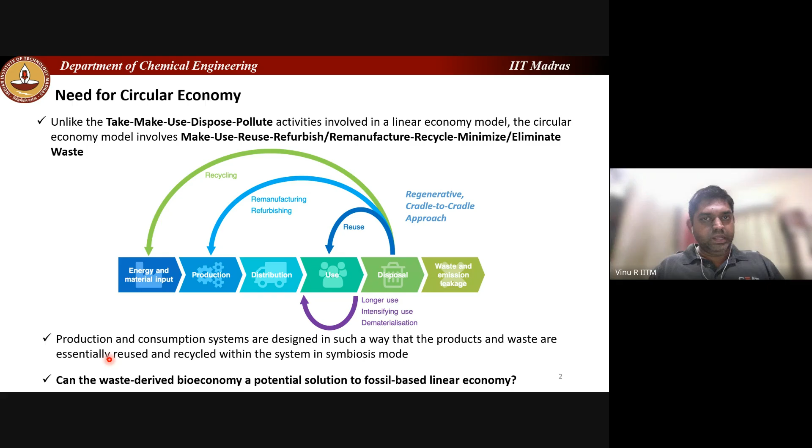Ultimately, the question is: can the waste-derived bioeconomy or circular economy be a potential solution to the fossil-based linear economy? This is still unanswered. There are a lot of challenges, which we will see.

What is a sustainable economy? If you think about it, take the example of the net zero pathway or net zero goals that different countries have agreed to, like the Paris Treaty. What it basically says is we try to make sure the global average temperature rise is kept within 1.5 degrees by bringing in a lot of strategic interventions.

But there are also reports that say this has already crossed 2 degrees. There are various reports that say that. So typically, a sustainable economy has to be viewed as one thing: it has to be bio-based, it has to be low carbon, and it has to be circular. I see sustainable economy as an intersection of bioeconomy, low carbon economy, and circular economy.

That means we try to replace a lot of fossil fuel derived materials with bio-derived materials. We try to achieve low carbon intensity emissions in the various processes we deploy, and we also make sure the materials go through a circular pathway, thereby enhancing the lifetime of these materials in our life cycle.

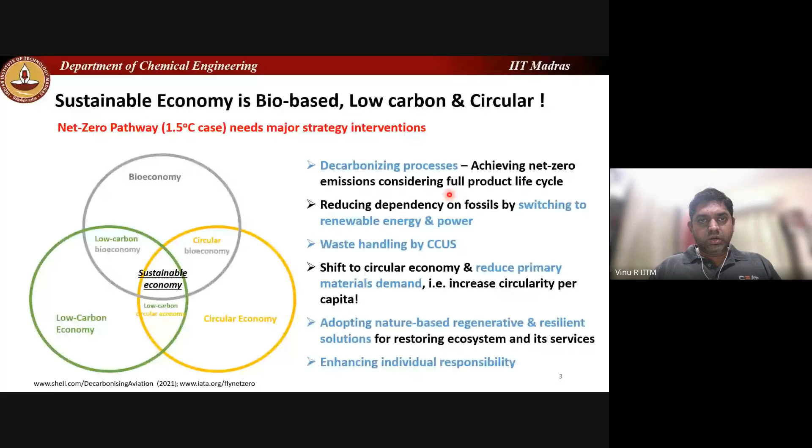So how do we achieve decarbonization? You might wonder why I'm talking about decarbonization here - it's about circular economy, but I feel circular economy is very much linked to energy, and waste and energy cannot be, or should not be, delinked from each other. We need to look at waste and energy as a single entity, or interrelated entities.

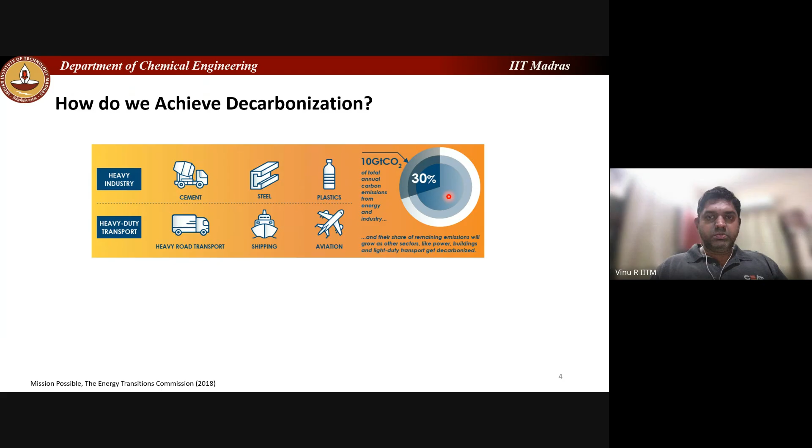If you look at the major industries emitting CO2 into the environment, it's basically the heavy industries: cement, steel, and plastics - that is, refineries. In terms of heavy duty transport, it's predominantly trucks, that is road transport, due to diesel use, shipping, marine fuels, and aviation fuels. All these put together contribute to about 30% of annual carbon emissions.

If I take the example of the aviation industry, it is leading to a lot of CO2 emissions, and today there is a lot of talk about sustainable aviation fuel, or SAF, that many countries are marching towards. There are even targets set that by 2030 there will be a certain number of billion liters, or a certain percentage of SAF, incorporated into aviation fuels.

If you look at the SAF requirement to achieve net zero by 2050 - 2050 is an ambitious target - you see that the amount of sustainable aviation fuel that must be produced is actually exponentially increasing.

Today we are actually very low in terms of SAF production, but if we have to achieve net zero, we have to really go up to 450 billion liters of SAF all over the world. That's a huge target. This is typically the impact of the emission from conventional fuels, and this is a compensation that we need to achieve decarbonization.

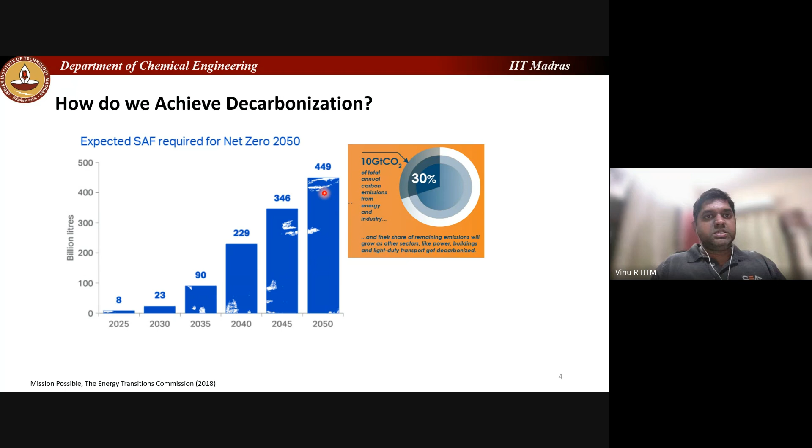So there are various roadmaps to decarbonization. The first thing is always reducing demand for carbon intensive products and services. That means we need circular economy in heavy industry. Thereby we can really make sure we are able to reduce the carbon emissions by 40% in it.

Similarly, if we are able to have efficient logistics, we can still reduce our carbon intensity by 20%. Improving energy efficiency is quite common to a lot of different process industries, where energy consumption has to be monitored in different processes, and we need to make sure the energy efficiency of the process is improved.

Ultimately, we need to move toward renewable power that is very much accessible due to solar and wind. There is a possibility that massive electrification can be done, and that can lead to substantial CO2 reductions, with electricity coming mainly from renewables.

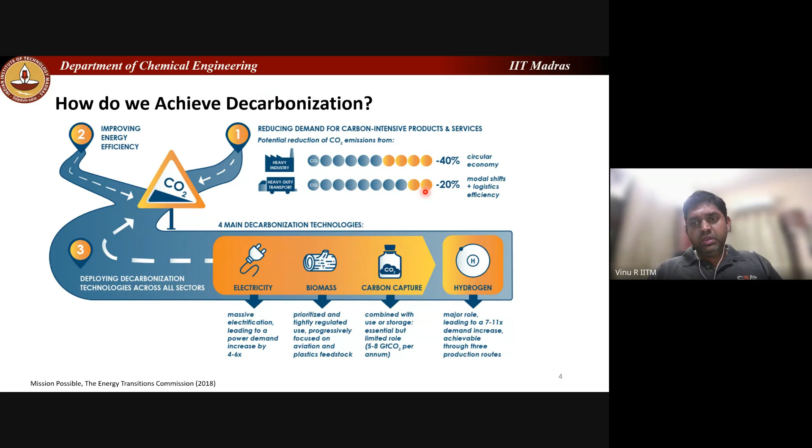Prioritize the use of biomass to make bio-based plastics and aviation fuels, or even transportation grade fuels. Incorporate carbon capture. And the last one is, already there is a lot of push around in India, especially, and in the EU, on the use of hydrogen as an alternate clean burning fuel. So basically, hydrogen is also one of the important things by which we can achieve decarbonization. And by the way, hydrogen can be derived through electricity or derived from biomass, so there are different possibilities there.

This is the International Energy Agency's prediction, a parachute diagram which shows what our targets have to be to achieve net zero by 2050. These are quite interesting things. Whether or not we achieve it is a secondary point, but at least this is for you to understand that this is a very ambitious target. Even though 2050 is quite down the line, at least two decades away, it is still a very ambitious target.

So you can see that if we have to achieve net zero by 2050: no new sales of fossil fuel based boilers by 2025 - is it really happening? No. 60% of global car sales must be electric. There should be about 720 gigawatts of electrolyzer capacity ramped up. Simultaneously, emissions from cement industries have to be captured and stored to the tune of 8%.

By 2035, no IC engine car sales should happen, no petrol or diesel based cars - everything has to be electric or hydrogen based. By 2040, 50% of existing buildings should be retrofitted to zero carbon ready levels, meaning electricity is going to be a major player in industry energy consumption. By 2045, no IC engine trucks, everything has to be electrified trucks or by hydrogen.

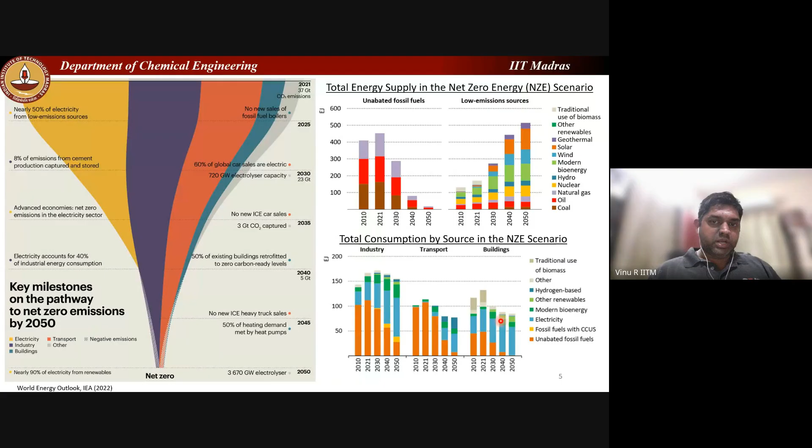When we are talking about bioenergy, that's where bio-based waste, which could be biomass, sometimes even waste plastics, can play a very important role. If you just take bioenergy, you can see that already it can really play a major role as a raw material for chemicals and feedstocks. It can play a major role in aviation fuels, shipping fuels, and it can be used for bioenergy, wherein you combust biomass to make electricity, power.

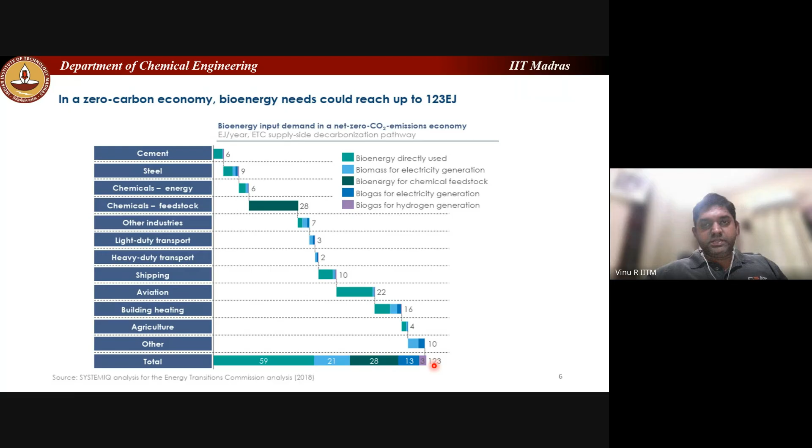And even in many other industries like cement and steel, you can really make this biochar, and this biochar can actually be a source of alternate carbon. So you can see that biomass can contribute in terms of direct use of bioenergy, for electricity generation, for chemicals, for biogas for electricity generation, and biogas for hydrogen generation. So in different forms, bioenergy could really provide substantial amount of energy to meet our needs.

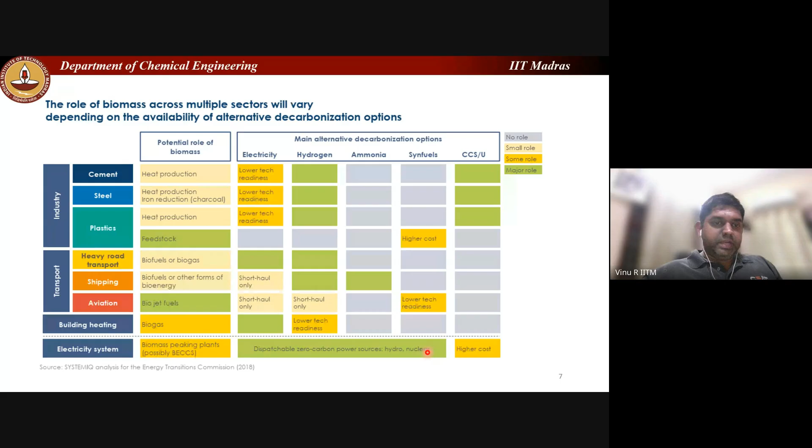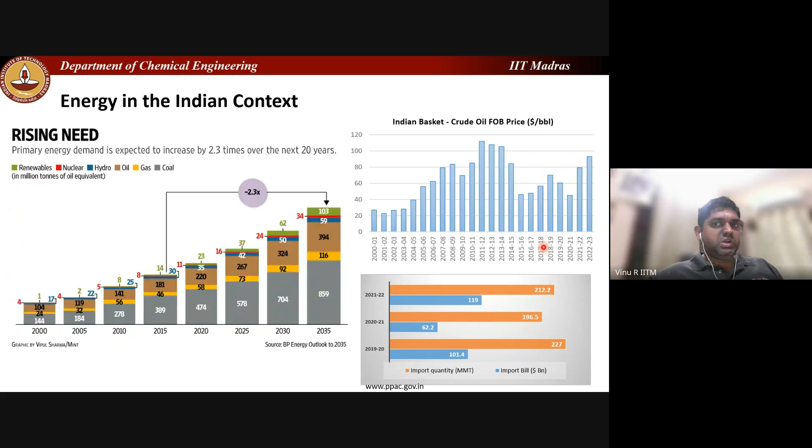So already there are reports that say that our soil carbon content has actually reduced by half. That also means that we need to protect the soil, and that's where biochar today is becoming a very, very important topic.

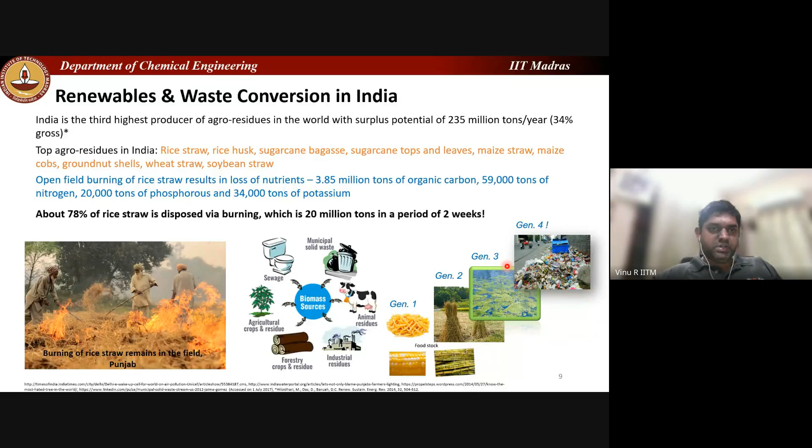Of course, these are debatable. There is also a trans-border issue, there are also wastes that are being shipped to other countries. We are not talking about it here; that's kind of a sensitive thing, but still, these are at least as per the statistics.

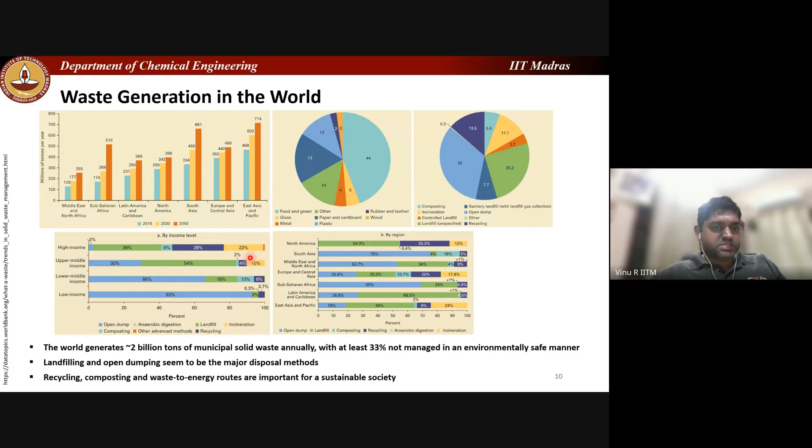And there are many other socio-economic issues that occur because of this unscientific way of disposal, or landfills that are really becoming dump sites. Because landfilling itself is a technology, a technique, a science actually, and the way you landfill it, you monitor it to make sure that you convert it at a later point in time to real estate. It's a very long time process.

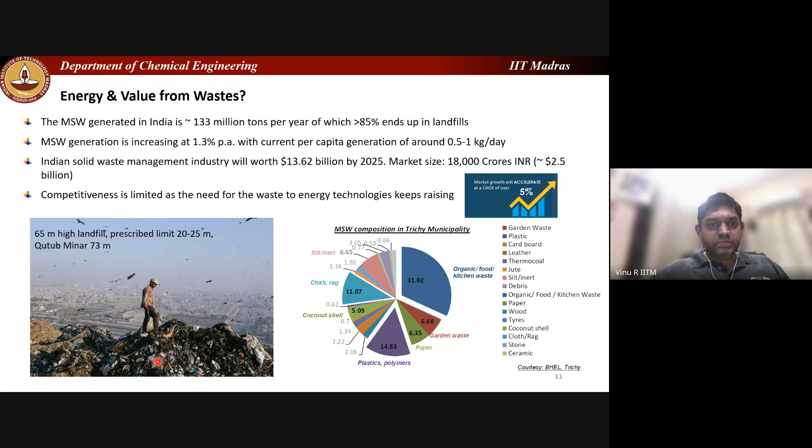But today, landfills are being simply biomined. There is leachate that is causing harm to the water bodies because of this. So there are a lot of issues that pan out because of these landfills not being properly managed, but really being used as dump sites.

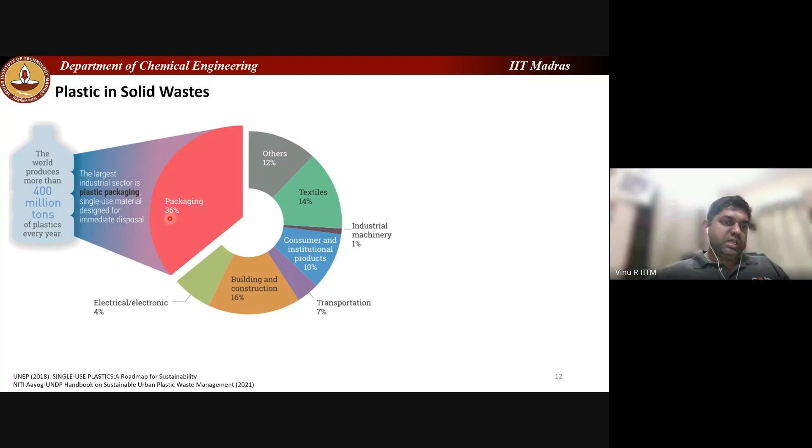Okay, so let's talk about plastics again. If you look at plastics, predominantly the packaging industry contributes the major fraction of plastic waste. In fact, of the plastics being made, almost 36% goes towards the packaging industry; other fractions always contribute less. And everyone knows the basic type 1 to 7 classification of plastic according to the Society of the Plastics Industry.

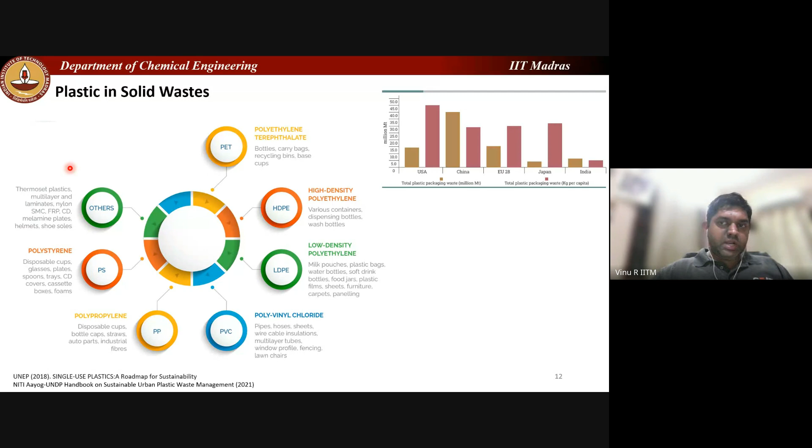On a per capita basis, we are probably doing much better than other countries in the world. But in terms of the quantum, we are actually increasing. This is about the total plastic packaging waste, not the total waste. On a per capita basis we look better, but in terms of actual volumes, we are not. This is still 2021 data.

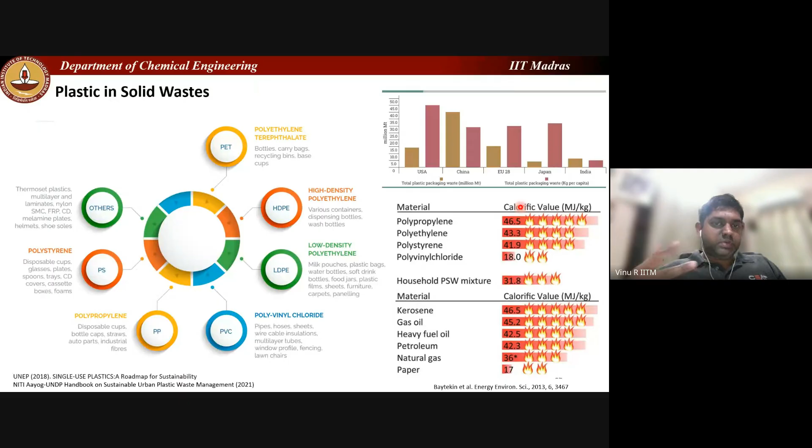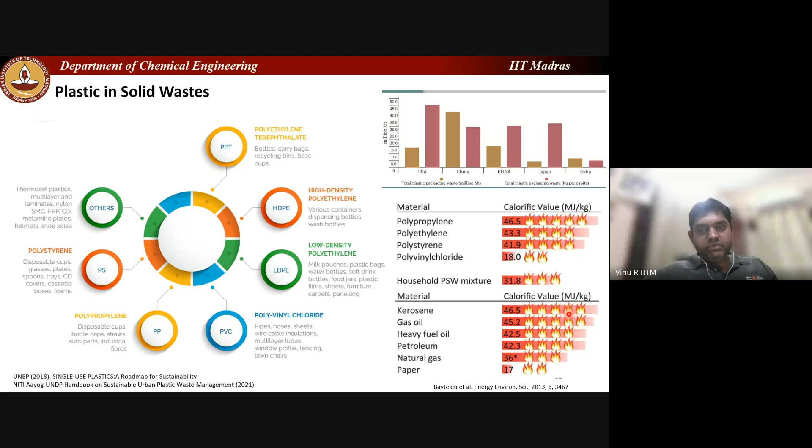And one of the biggest advantages of plastic is that because they are derived from hydrocarbons, they have a very good calorific value. So compared to lignocellulosic biomass, it's quite easy to convert plastics back to any kind of hydrocarbon-derived fuels or fuel oils.

And one important point is, besides the 7 categories of plastics, in India we also have the EPR guidelines, which are very nice, where plastics are classified into 4 categories. Category 1 is rigid plastic packaging, usually made of HDPE and PET. Category 2 is flexible plastic packaging of single layer or multi-layer. Category 3, multi-layered plastic packaging, at least 1 layer of plastic and 1 layer other than plastic, like aluminum foil. And category 4 is plastic sheet used in packaging as well as carry bags made of compostable plastics.

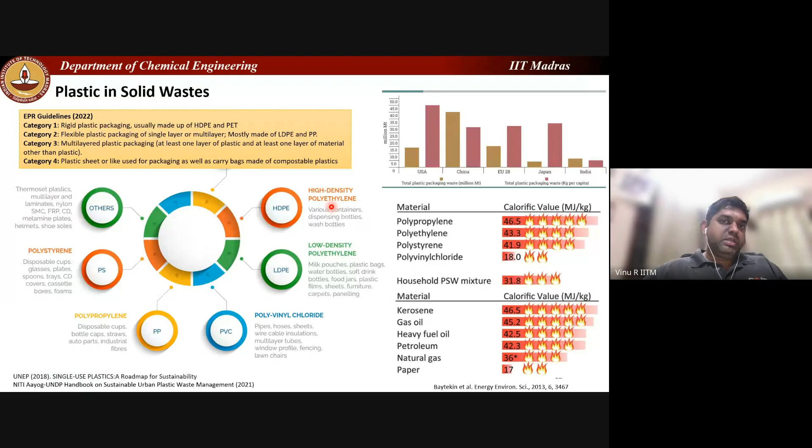So this adds another layer to plastic sorting, with extended producer responsibility coming into the picture to make sure that plastic disposal is well taken care of, and it also gives some kind of binding to the industries or companies that use plastic as part of their packaging or even their product.

Hello, am I audible? Yes, sir, you are audible. Okay, just want to make sure.

So just like a water cycle or a carbon cycle, what is also emerging today is a plastic cycle, sometimes called a microplastic cycle, because plastics are becoming a very important component in all parts. Every part of our human body has been identified to contain some plastic, microplastics or nanoplastics. So the complete plastic cycle goes like this: fossil carbon is used to make plastic by the refineries, then it is used and disposed.

A part of it goes to energy generation, which results in greenhouse gas emissions. Or you landfill this plastic, which can result in leachates that percolate and contaminate the groundwater, or the leachates through wastewater treatment can go out as effluent. And ocean plastics, because they spend a lot of time in saline water, can lose their properties and break down into millions of microplastics, nanoplastics, and finally dissolved organic carbon. So this is the plastic cycle we can think of today.

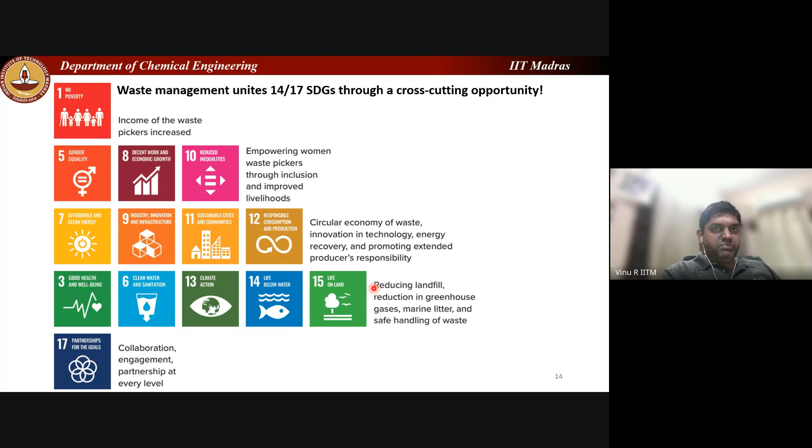So overall, waste management really unites 14 of the 17 sustainable development goals through a cross-cutting opportunity.

So, I mean, this is quite self-explanatory here. So, right from 1, 5, 8, 10, to empowering women, to circular economy that can really promote 7, 9, 11, and 12, very, very important and directly related UN SDGs. And overall, it can actually lead to the betterment of life on land, life below water, climate, right? It can ameliorate the extreme climates, clean water, good health, and finally, obviously, partnerships are important. The global partnerships are important to achieve some of these goals.

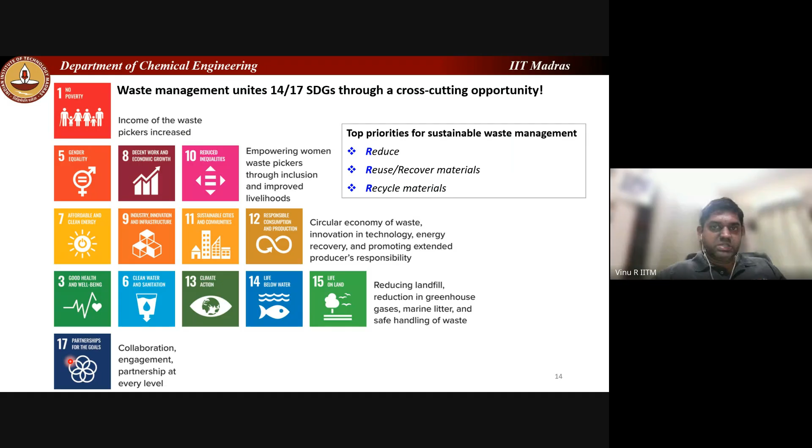Okay, so this is just to give you a background of where we stand with regard to waste. I've probably given you an outline of what are the different wastes and why it is important, some statistics and things like that. Now let's move to the second part of my talk, wherein I'll be focusing on what we do in our group and things that are very much related to waste management.

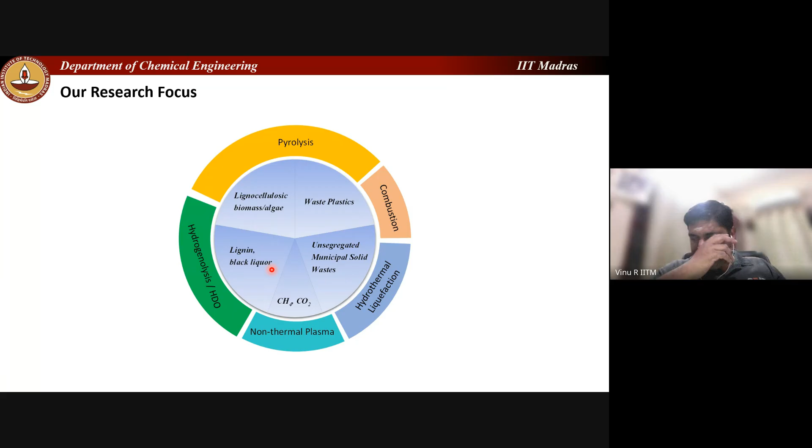So we deal with a lot of different raw materials: lignocellulosic biomass, agro residues, waste plastics, unsegregated MSW, lignin, methane, carbon dioxide, and so on. And we apply different processes to convert these raw materials into valuable products. So we apply pyrolysis, combustion, hydrothermal liquefaction. We use non-thermal plasma, and then we also use catalytic techniques like hydrogenolysis and so on.

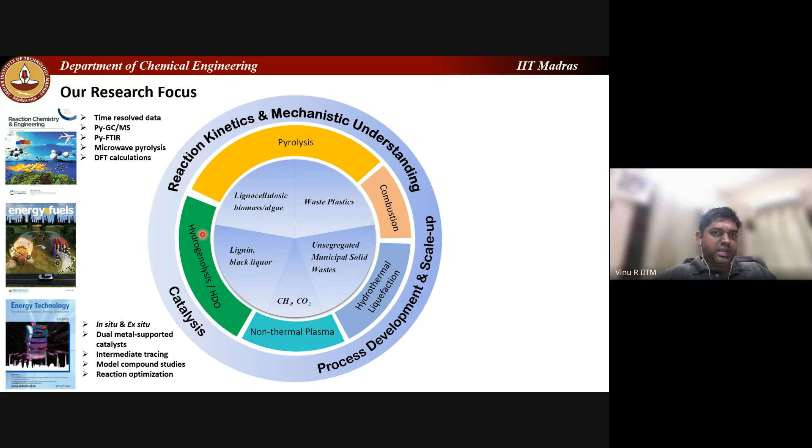And ultimately, we try to gain a better understanding of the processes by applying some time-resolved data. We use different hyphenated techniques to understand the reaction mechanism and kinetics, catalysis, and we also do some process development and scale-up. Not everything, but at least the best candidates, we try to scale up to a larger scale.

So the underlying questions that we always try to answer are: can the waste-based bioeconomy be a potential solution to the fossil-based linear economy? And is it really sustainable? Sustainability is not just about a process, whether we are able to achieve something by replacing fossil material with a biomaterial. That's not just about sustainability.

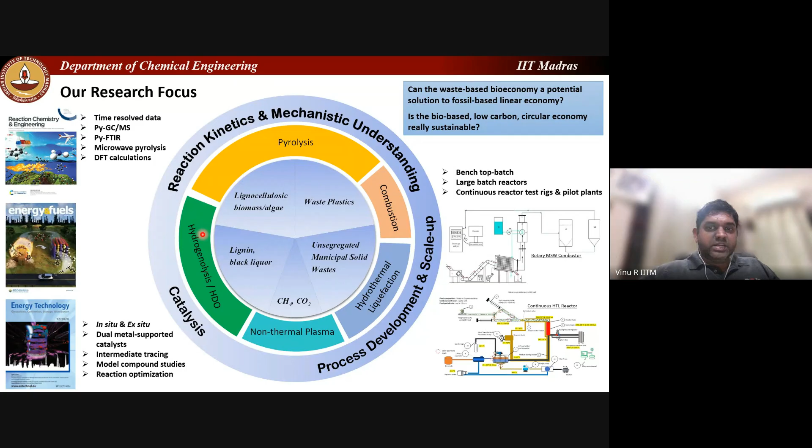Sustainability is cross-cutting. The process has to be sustainable, right? The raw materials, the products have to be sustainable, right? The new process or the new raw material that you're using should not really harm the environment in terms of the byproducts that they generate, right? And sustainability is also linked to socio-economic, socio-technical, socio-political aspects, and it really cuts across various disciplines.

So one major aspect that we focus on in our group is to convert a lot of these different wastes to liquid fuels. Converting any kind of raw material to liquid fuel is challenging, but this is something that we want to do because liquid fuels can be stored, they can be easily transported, and they can also be upgraded to better fuels, and you can also make fine chemicals and valuable intermediates

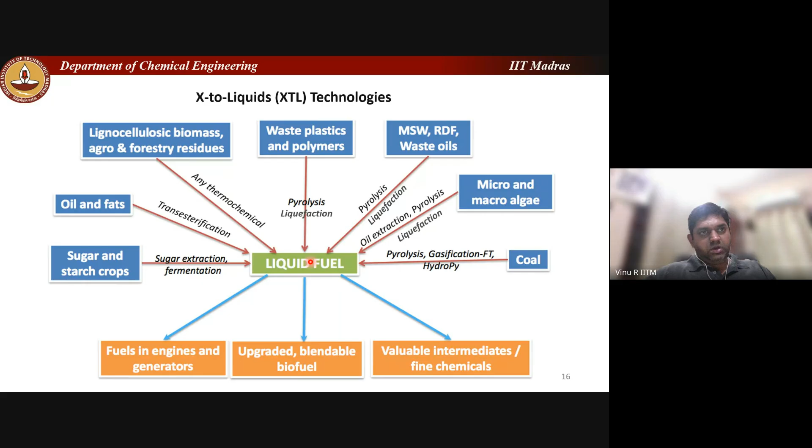based on the raw materials. So we basically mapped the different techniques that are used to convert different types of raw materials to any kind of liquid fuel. It's not that we make the same liquid fuel from different raw materials or processes, but something that is a liquid. Okay, so that's our big picture goal of what we try to do.

So the challenging aspect is, if you talk about, let's say, biomass, even if you consider woody biomass, the moisture content can vary widely. Similarly, if you take a manure, the moisture content is going to vary substantially. And even the volatile matter in a typical woody biomass can vary in a very wide range. So the challenge with biomass or even MSW here is that the properties vary over a very, very wide range.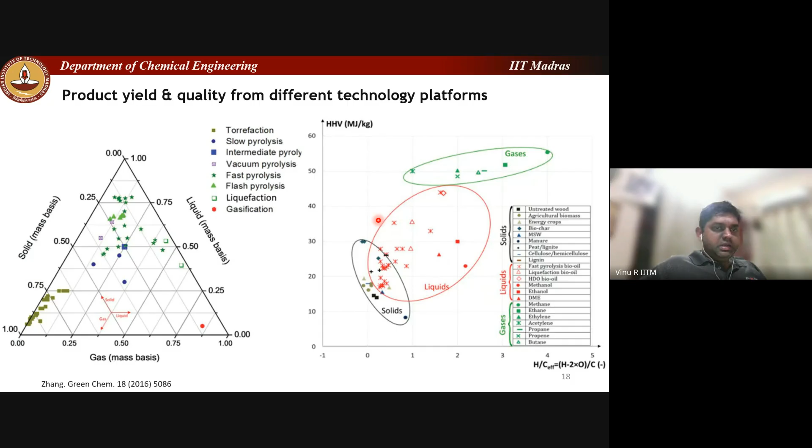broad range. So what I mean to say is raw materials determine the type of products formed, and so do the technologies that you use. Both these are going to really play an important role in determining the yield and the quality of your products. So first, coming to the pyrolysis process. Again, in the interest of time, I may skip some slides, but I would like to focus on certain technologies, so that at least the understanding is clear on some aspects.

So pyrolysis is a process wherein we try to heat the material to high temperatures in the absence of oxygen. That's a very simple description of it. But more technically, pyrolysis is a process that can be used to tune the product distribution. Whether you want high amount of liquid or biochar or gases, everything can be achieved provided you are able to tune the operating conditions. And what are the operating conditions? It's all about your pyrolysis severity. Temperature and residence time really control the yield of products you get from the pyrolysis process, and that occurs through a set of primary reactions and a set of secondary reactions that occur during pyrolysis.

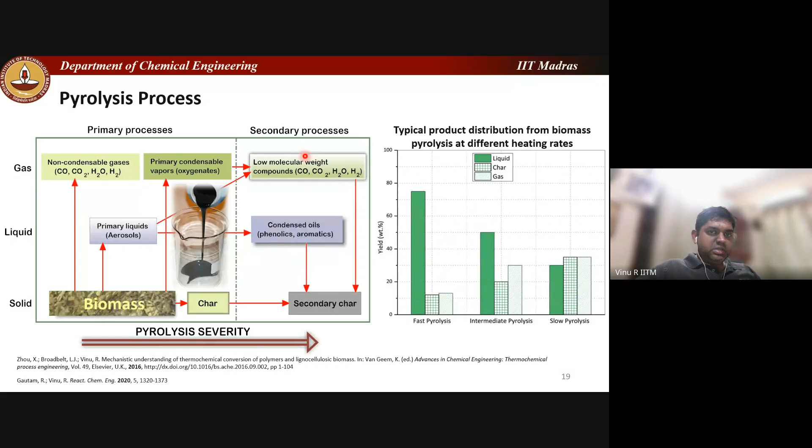So, for example, if you take biomass, typically the primary processes result in the generation of liquid aerosols and gases. And if you're going to have a longer residence time or a higher temperature, that can result in the secondary transformation of these primary pyrolysis vapors to condensed oils, phenolics, and secondary char. So typically in a thermal degradation process, the material that contains physisorbed moisture gets released, and the material decomposes into tar, gases, and char. In secondary pyrolysis, you have reactions like reforming, dehydration, cracking, occurring simultaneously to change the composition of the products.

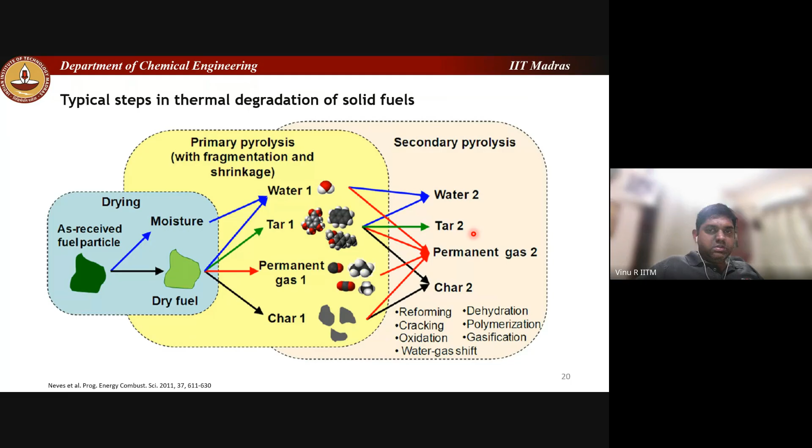So I'll probably cover plastic pyrolysis today. If you think of plastic pyrolysis, actually it's not a new subject. A lot of it is known, and it is well proven that from olefinic plastics like high density polyethylene, low density polyethylene, polypropylene, polystyrene, you can get very high yield of oil that is rich in hydrocarbons like aromatics or aliphatic hydrocarbons that can be seamlessly blended or upgraded to liquid fuels.

But some plastics like PET or polyvinyl chloride are not really good plastics to be pyrolyzed, because PVC pyrolysis results in a substantial amount of HCl vapors due to dehydrochlorination reactions. So it can result in toxic fumes, and it can be an emission problem. Whereas PET does not degrade well during pyrolysis, but it's a very highly recycled polymer in the world. So different polymers decompose in different temperature regimes, and it's first important to understand the typical decomposition temperature of the polymer before devising a pyrolysis process.

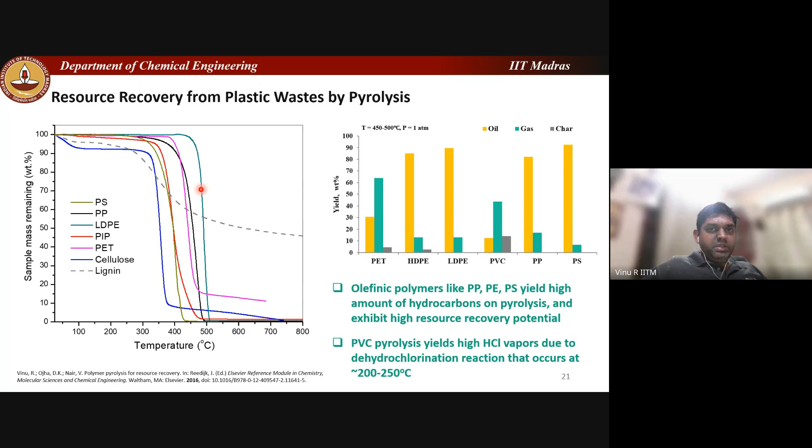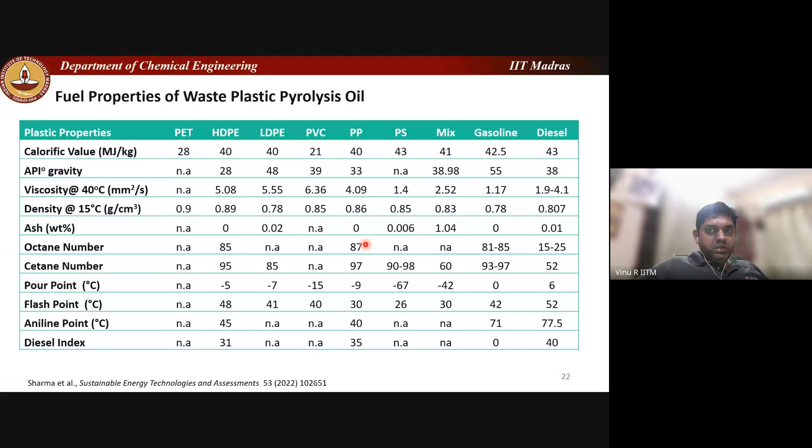And the properties of the pyrolysis oil are also reasonably well documented. Compared to diesel, you can say that polypropylene or HDPE, LDPE oil is quite close to the properties of diesel, not only in terms of the calorific value, but also in terms of other properties like the cetane number, pour point, and so on.

So I would just like to give you an example of one type of waste plastic resource recovery that we did. If you consider the typical COVID scenario that we faced, we were using a lot of waste PPE kits, that includes coveralls or simply face masks, gloves, and so on. At that time, biomedical waste rose by about 10 times because of excessive use of these COVID PPE kits. And if you go by the typical environmental laws, biomedical waste is supposed to be incinerated. So whether it has contaminants or not, the moment it is coming out of a hospital, the treatment is basically autoclaving, microwaving.

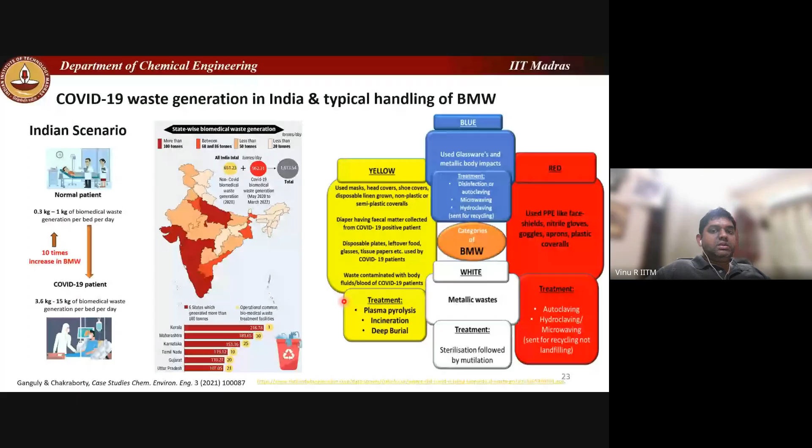You are not supposed to do any landfilling. And even recycling is not actually a CPCB approved process. For example, if you take the yellow bag materials, those are supposed to be incinerated through plasma pyrolysis or incineration. So there are laws.

So we use pyrolysis as a technique to identify the polymer, and at the same time, we try to use it as a process to decompose the polymers into different valuable products.

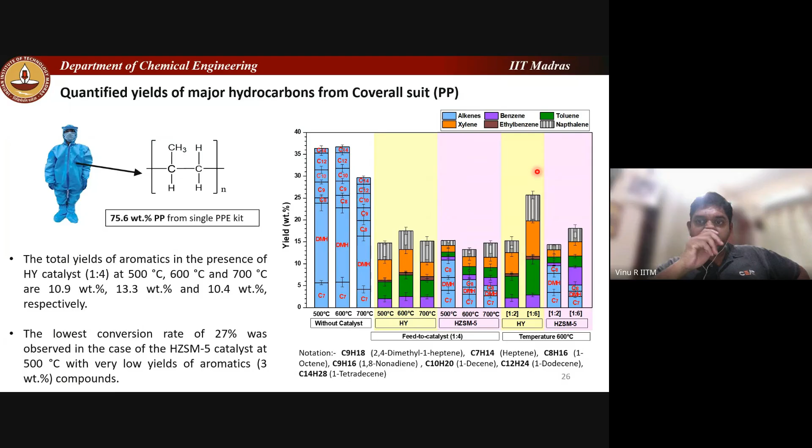We try to use different catalysts like zeolite Y, ZSM5, and do some optimization of the temperature and catalyst loading and other things. Ultimately we were able to get benzene, toluene, xylene, ethylbenzene, and naphthalene as the major products in the product distribution. This is important because the major petrochemicals are benzene, toluene, xylene, which are used as octane number improvers in gasoline mixes. So this is one of the important applications of making BTEX.

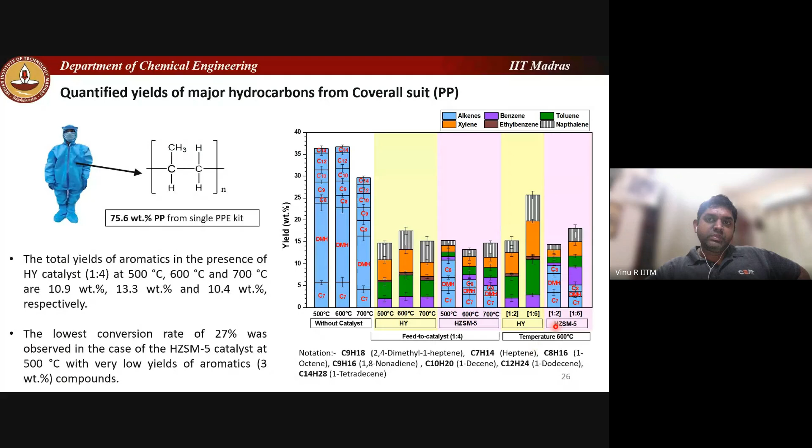If you take other polymers like PET - PET is a polymer that is widely recycled in the world. But pyrolysis as a resource recovery or recycling strategy is not actually good based on literature - it's not a very good process for PET recycling. But what we observe here is by using some catalysts, we're able to improve the yield of products like benzene as a simple chemical from PET. So we get benzene, toluene, xylene as the major products, and the benzene yield was quite higher in this case.

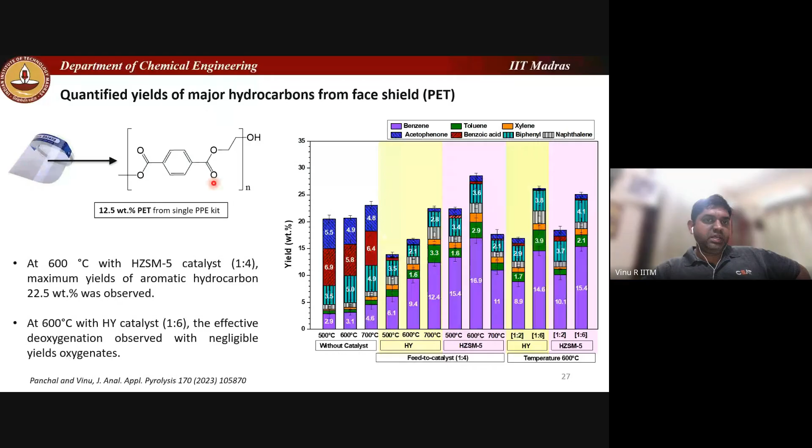But without using a catalyst, you see that you will make acetophenone, benzoic acid, biphenyl, which are basically the depolymerized products of PET. Because PET is an oxygenated polymer, it's not like polypropylene, which is only a hydrocarbon. It's an oxygenated polymer, so degrading it results in oxygenates in the product distribution.

Then we even studied more complicated mixtures, like this multi-layered plastic packaging for hydrocarbons. You can see we tend to dispose a lot of this plastic packaging waste every day. So it's important that we make sure these multi-layered plastic packaging wastes are carefully disposed and properly recycled.

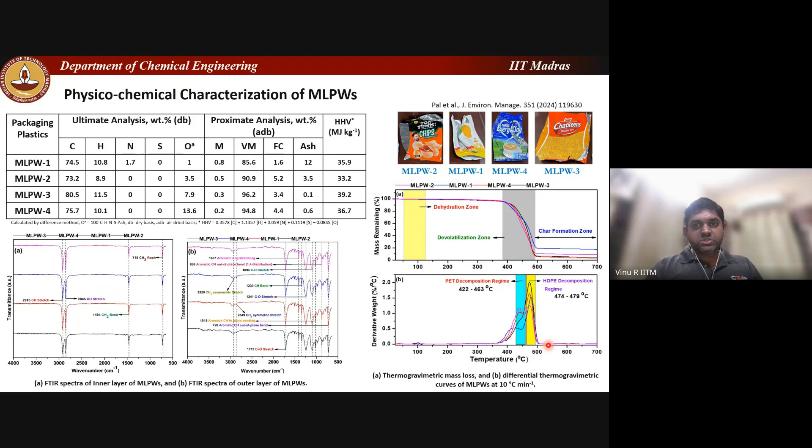When we did a basic TGA analysis, we could see there are two specific decomposition regimes, one corresponding to PET and the other corresponding to HDPE decomposition. So this is a very basic characterization to understand what this is made of, and then we try to do a pyrolysis study to understand what different products we get out of it, and whether we can really make anything useful from it.

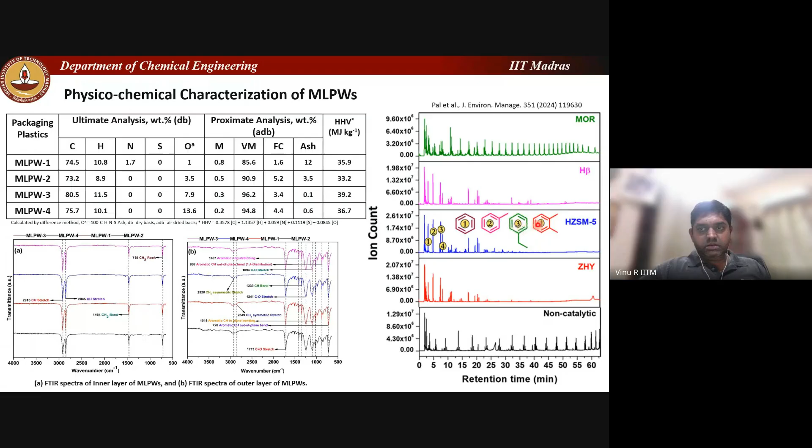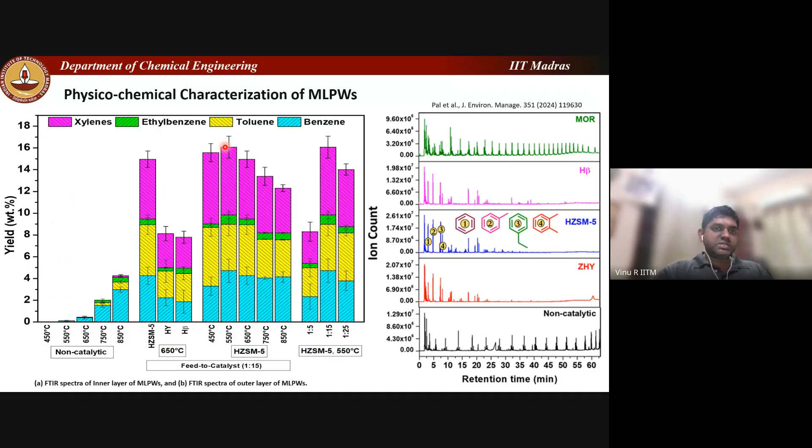So here, when we do a non-catalytic pyrolysis, we get typical characteristics of polyethylene decomposition without any specificity. Selectivity is always the key in a lot of these processes. It's not about how much conversion you're achieving, but how selectively you're actually able to make a specific product. In this case, with ZSM5 catalyst, we could make benzene, toluene, xylene, and ethyl benzene as the four major products from this MLP. Here, after some optimization, we got a maximum of about 16% yield of just these four products from MLPW.

We also tried to extend this to scenarios where plastic cracking is accompanied by contaminants that may be present, which could be biomass. That resulted in a lot of our studies focusing on co-pyrolysis of biomass and plastics. The fundamental idea here is that biomass is oxygen rich, plastic is hydrogen rich. If you do only biomass pyrolysis, it would result in oil containing a lot of oxygen containing molecules, so if you blend it with plastics, it could marginally improve the yield and quality of the product.

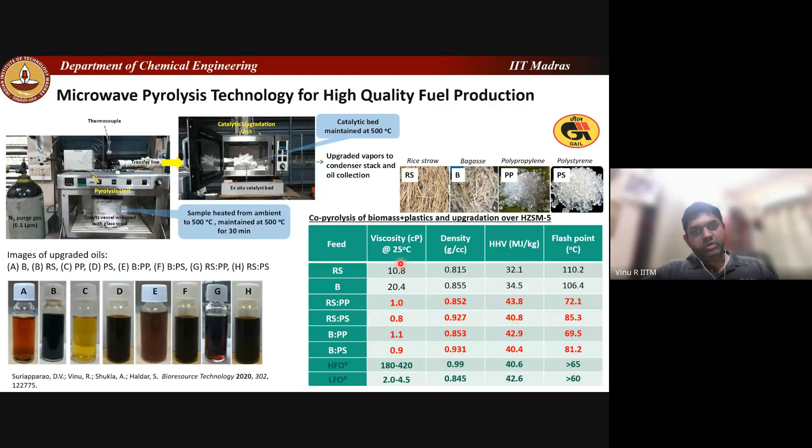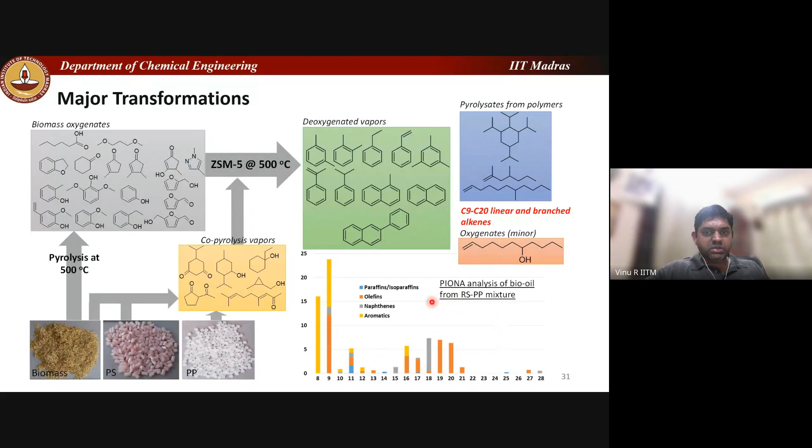So if you look at the PIONA distribution, that is paraffins, isoparaffins, olefins, naphthenes, aromatics, a typical refinery fuel analysis, you will see that this oil contained predominantly aromatics and olefins, mostly aromatic hydrocarbons that are derived, as shown here. But the higher carbon chain length molecules are mostly olefins, naphthenes, and some amount of paraffins present here.

We also extended this to plastic mixtures. Instead of biomass plus plastics, we have also done a lot of studies on plastic mixtures, such as polystyrene, polyethylene, polystyrene, polypropylene, and polystyrene, polypropylene, polyethylene. This was part of a bigger UK-India project, wherein some of these oils were also blended with diesel and tested in engines.

For the performance of the diesel engines, you can see that with a tri-component mixture at 1100 watts, slightly higher power using ZSM5 catalyst, we could actually get typically the products in diesel range, but still it is not a diesel fuel because aromatics are high, because polystyrene results in aromatic hydrocarbons in the oil. And if you go with something like paper mill waste or cellophane, that would result in a lot of other oxygenated compounds as well.

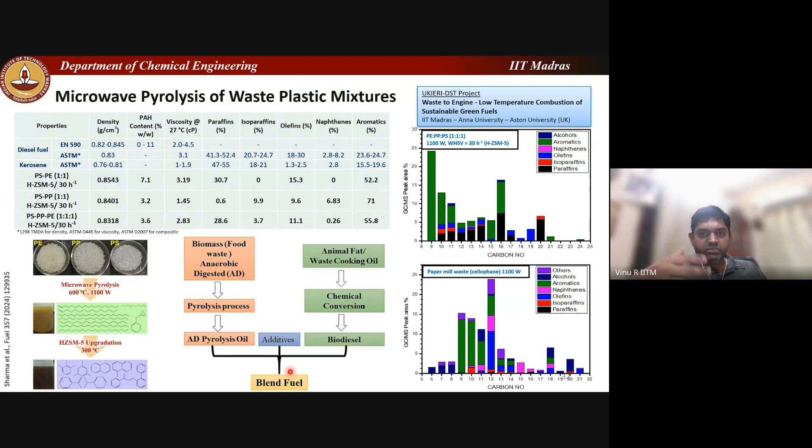So we have done multiple things, wherein we have used food waste digestate, anaerobic digestion pyrolysis oil with biodiesel. We blended it, and we have also shown that it exhibits marine fuel like properties. This has also been extended to many other cases.

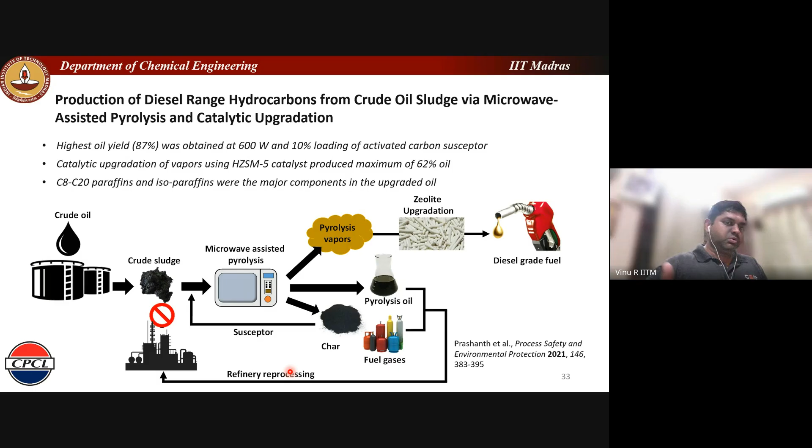I'll just present very quickly some of the cases here. One is we have used crude oil sludge that is collected in the bottom of crude oil tanks in refineries, and we have shown that using microwave pyrolysis and zeolite upgradation, we can make diesel grade hydrocarbon fuels containing mostly paraffins and isoparaffins.

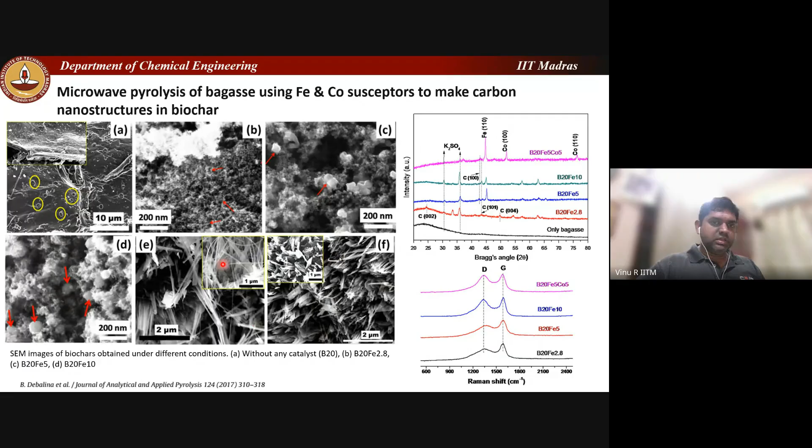Again, through pyrolysis, these are some exploratory stuff. For example, nanomaterial production from biomass, especially with high ash containing biomass, is not really a commercially viable thing, but at least as a proof of concept, we have shown that using iron and cobalt can result in nanostructures in the biochar. Using lignin, you can make phenols in very high selectivities, and you can also activate the pyrolysis biochar derived from microwave pyrolysis to make more porous nanostructures, high surface area materials that can be used for adsorption of dyes from wastewater. So we have done a lot of these kinds of studies using pyrolysis.

So maybe in the next 10 minutes, do I have 10 minutes, ma'am? Another 10 minutes? Up to 9 o'clock, sir. Okay, I'll try to close in 10 minutes so that if there are any questions, we can take them.

Yes sir, sure. So the next topic is on a slightly different technology called hydrothermal liquefaction, which we have been working on over the past 6 years. Generally, if you think of pyrolysis, combustion, or gasification technologies, one major requirement is your raw material has to be reasonably dry, meaning the moisture content has to be limited to 10 to 15%. If the moisture content is more, you are actually spending a lot of energy simply drying away the moisture from the sample, which is an energy intensive step.

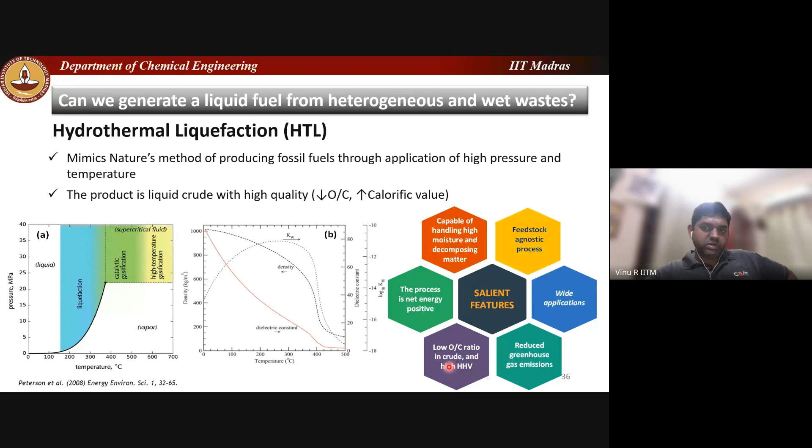It's very natural to say that it mimics nature or the geothermal conversions. The salient features are that it's a feedstock agnostic process. I'll talk about a lot of these in the coming slides. In a typical process today, we have actually scaled this up to TRL 6.

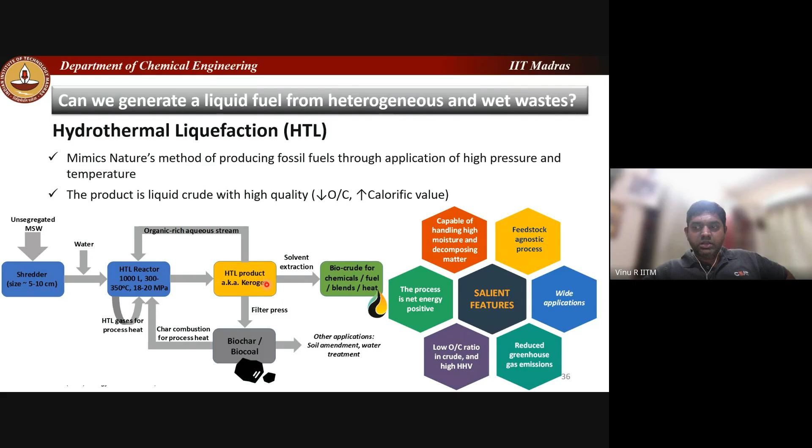We do HTL, we derive the product, and we do a lot of energy integration. We also use this biochar to combust and provide some process heat. Ultimately, we make oil and char as the major products of this process.

What are the applications of the product? The process itself can work with a wide variety of feedstocks. Typically the crude oil is more like a hydrocarbon crude oil, but it's not really a hydrocarbon—it will also contain some oxygen and other molecules because it is derived from agri waste and industrial waste. So we are making some drop-in fuels, which can directly be blended with crude oil, can be fractionated, or upgraded mildly by doing some cracking, or made into bioplastics, biolubricants, and so on.

You get biochar, which can be simply combusted for energy applications, or used as a soil amendment. You also get wastewater because typically you use about 80 to 90% water, so the raw material is in the form of a slurry. You get product water, which can be used in agri applications, for anaerobic digestion, or recycled in the process.

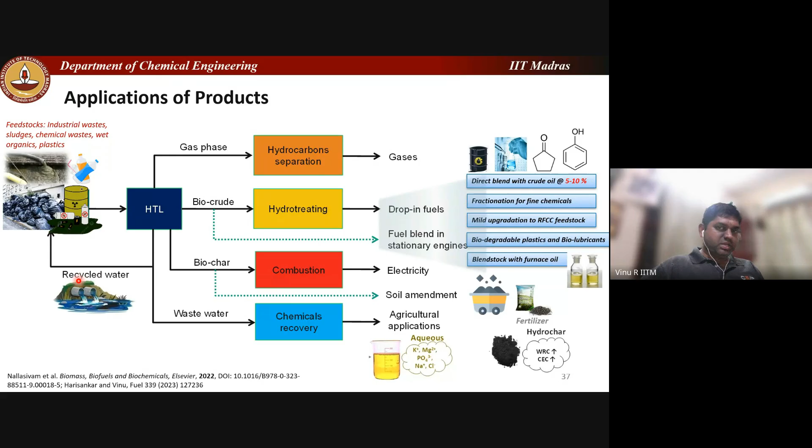Initially I talked about pyrolysis technology, and now I'm talking about HTL technology. Which one is better? If we're converting biomass, agri residues, or biogenic waste, HTL is better because the HTL crude oil has better carbon content, lower moisture, lower oxygen, and so it has a better calorific value than pyrolysis bio oil. But the downside is that the viscosity of the oil is going to be quite high.

There are ways to handle and reduce the viscosity even during the process, by having some additives. But just doing an apple-to-apple comparison, this is how it looks.

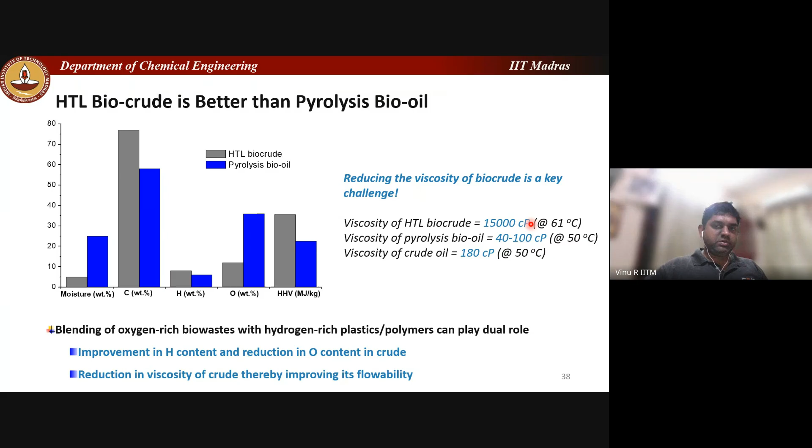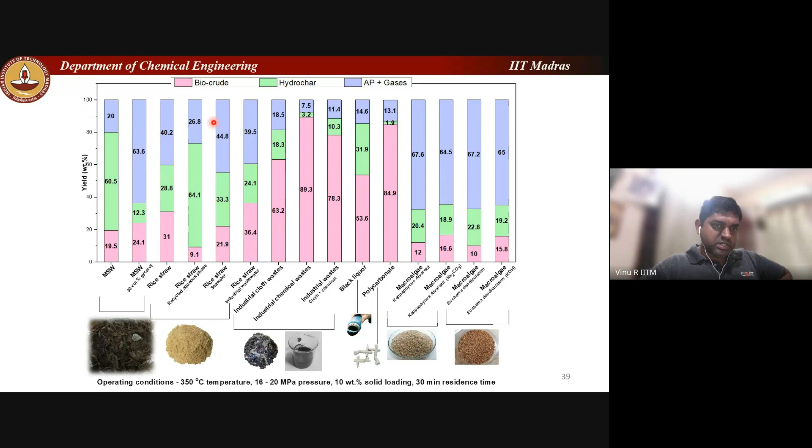This is about the different raw materials we have tested in our lab, from municipal solid waste, rice straw, industrial waste, black liquor, lignin black liquor, polycarbonate, macroalgae, seaweeds, and so on. We have scanned a wide variety of feedstocks. A lot of this work was done by my student Harisankar, who is also from TKM College, Kollam—he did much of the HTL work I'm presenting here.

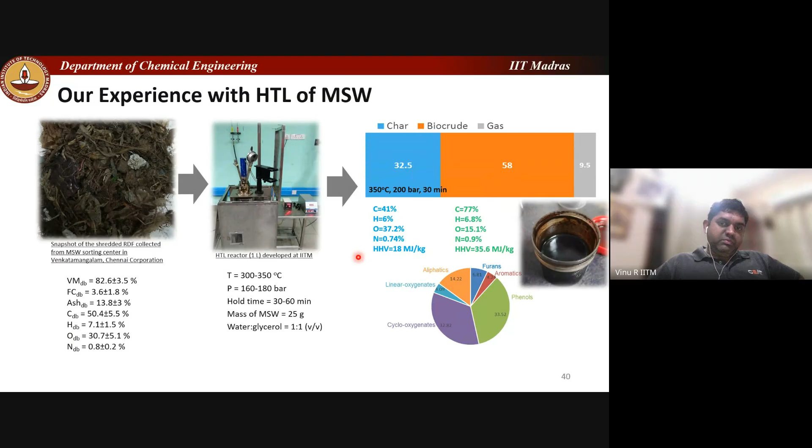This is about some results from municipal solid waste HTL. This is a typical shredded RDF, refuse derived fuel, which we collected from an MSW sorting center in Chennai—these are all batch reaction tests. You can see we also used some amount of glycerol, a biodiesel industry waste, as a co-solvent to improve the yield of the crude oil, which contained a calorific value better than the pyrolysis oil.

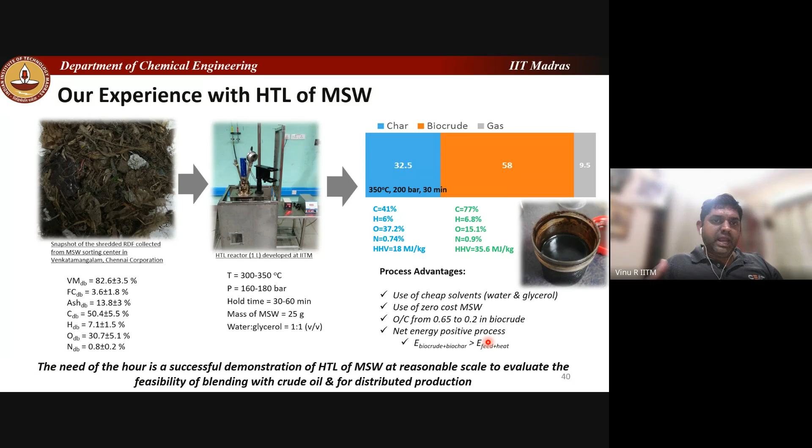Overall, we have now even scaled it up to a bigger level, but typically the energy content of the product is going to be much higher than the energy of the raw material and the heat that you provide to the system. That is the bottom line.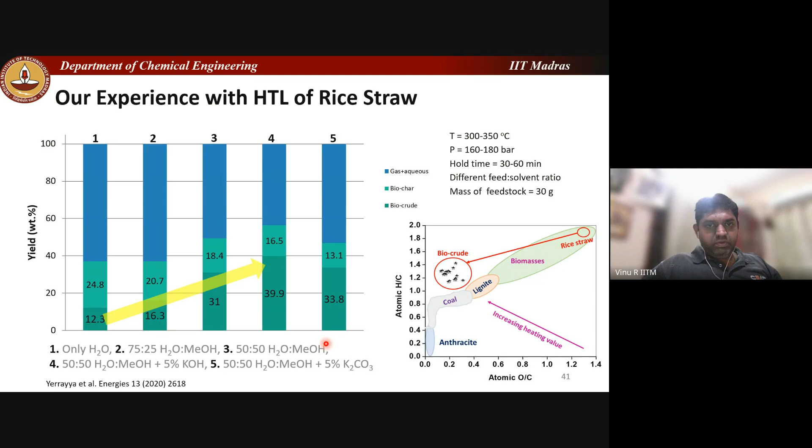We have worked with rice straw, using methanol as a co-solvent—not really ideal, but this was part of our research activity where we got very good quality oil using methanol as a co-solvent. You can also use other catalysts like potassium hydroxide, sodium hydroxide, or carbonates, because these homogeneous catalysts, unlike heterogeneous ones, dissolve in water.

The homogeneous catalyst can improve decarboxylation, that is removal of carbon and oxygen in the form of CO2, which is the main step in the HTL process. Whereas in the pyrolysis process, CO removal is the major step. So you can understand why HTL is better: for every carbon removed, you are removing 2 oxygens in the form of CO2, whereas in pyrolysis, for every carbon removed, you typically remove only 1 oxygen.

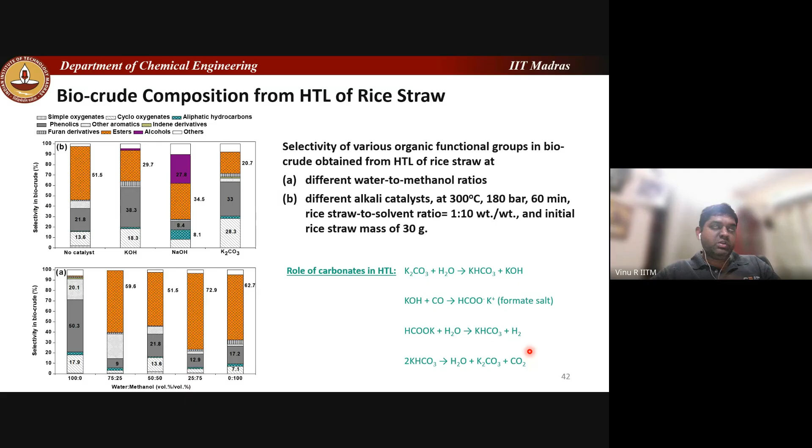Okay, this is just one way to understand why oxygen removal is more in HTL, which actually results in better calorific value of the product.

Okay, some products that we got from HTL of rice straw. We have also done a lot of process intensification strategies, like aqueous phase recirculation. So you do this process, you get the aqueous phase. Can you really recirculate this back to the process in the next step, so that in a continuous process, you can think of recycling the aqueous phase into the process?

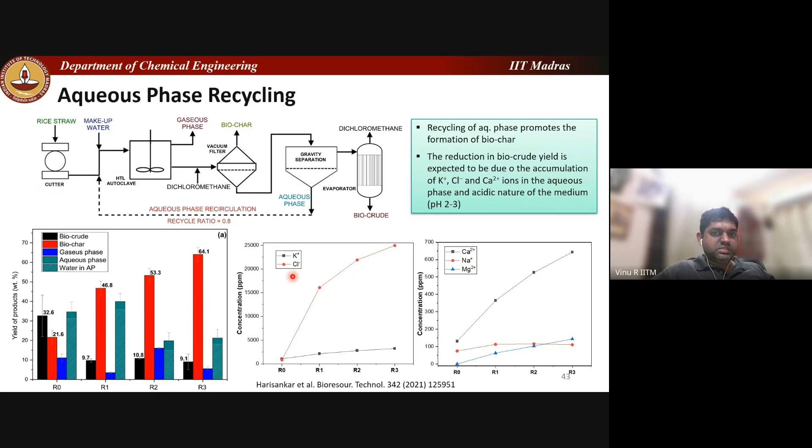So this was actually not very favorable for rice straw, because the crude oil yield decreased and the biochar yield increased, and that fundamentally was due to the release of potassium and chloride species from rice straw, because rice straw is a complicated biomass, containing potassium and chlorine in the form of inorganics. During HTL, these species get transferred from the biomass solid phase to the liquid phase, and this plays a deterring effect on the production of oil.

Okay, and we have also tried to use different things like tap water, wastewater, industry wastewater. This is recycled wastewater from IIT Madras, this is industry wastewater, and even seawater, to understand how the product yields would look like.

So again, just like pyrolysis, where you can vary the temperature and residence time, even in liquefaction, even in hydrothermal processes, you can improve the crude oil yield through liquefaction, and increase hydrochar yield through carbonization. Carbonization operates at low temperatures of 200 degrees, 70 bar, and 4 hours. Whereas liquefaction operates at a higher temperature of 350 degrees, 180 bar, and 30 minutes. Short time, high temperature here; low temperature and long time there.

Okay, so it's a very similar process, but this results in hydrochar with different characteristics. So here you see that using different types of water, we got up to 75% yield of the hydrochar

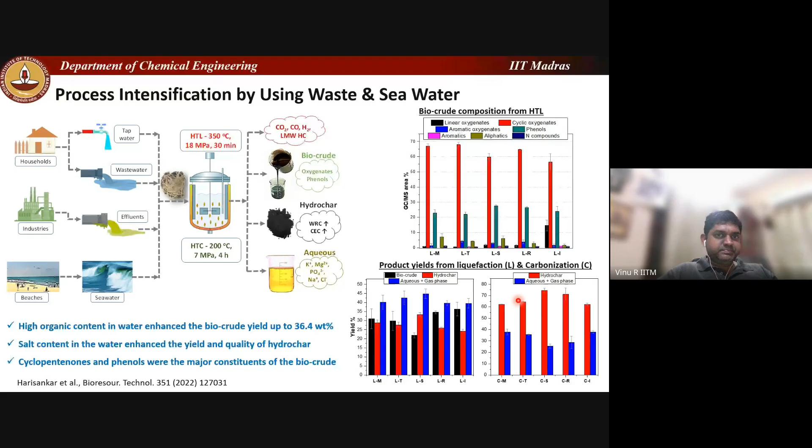from rice straw. Okay, just to wrap up, if you are going to compare the quality of the oil with different types of fuels, where do we really stand?

If you think of plastic oil derived through HTL, the calorific values are very high and comparable with diesel crude. The oil from MSW HTL will contain a lot of oxygenates, but it has to be upgraded. So here you can see the oil that we derived from industrial waste was actually upgraded to contain a lot of paraffin. We were able to improve the calorific value from 33 to 41.

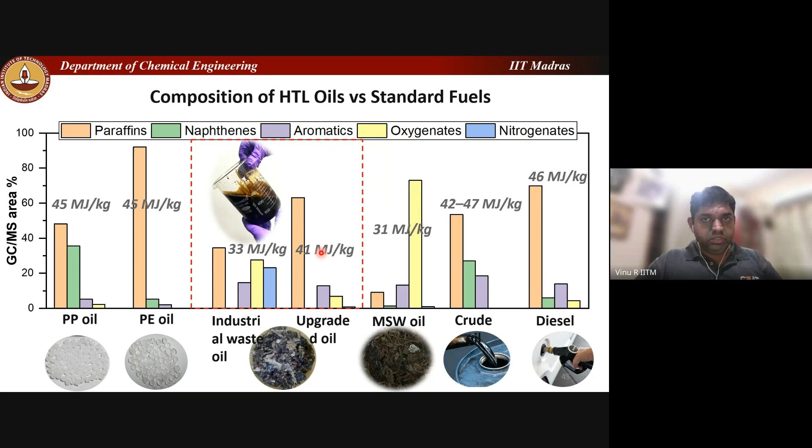Okay, so obviously, by tuning the product composition, that is typically the elemental composition and the hydrocarbon composition of the products, you can actually achieve much better quality of the product.

So if you look at it here, this is an overall comparison. Here you have HTL oil, this is distilled HTL oil, then you have pyrolysis oil, then standard fuels like light fuel oil, heavy fuel oil, diesel, marine fuel, lubricant oil, crude oil.

So you see here that the density of HTL oil is much better than pyrolysis oil, closer to the diesel range, whereas this is very heavy. You can see the flash point of the HTL oil is similar to marine fuels, because marine fuels need at least 60.

And then you can see that the viscosity is lower and probably similar to marine fuels. Calorific value is not as high, but at least much higher than pyrolysis oil and so on.

Okay, so again, one-on-one comparison of processes is also important, and of course overall you have to look at processes from a techno-economic and life cycle assessment perspective, which I'm not actually presenting here.

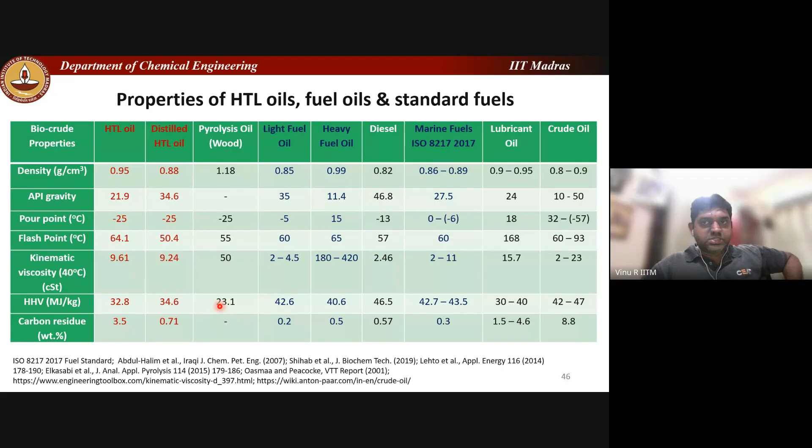And we are also converting a lot of our batch processes to continuous processes through our startup company. So we have a 100-liter batch unit in IIT Madras. These we are building now in IIT Madras Discovery Campus, and this is an operational unit in an industry in Chennai.

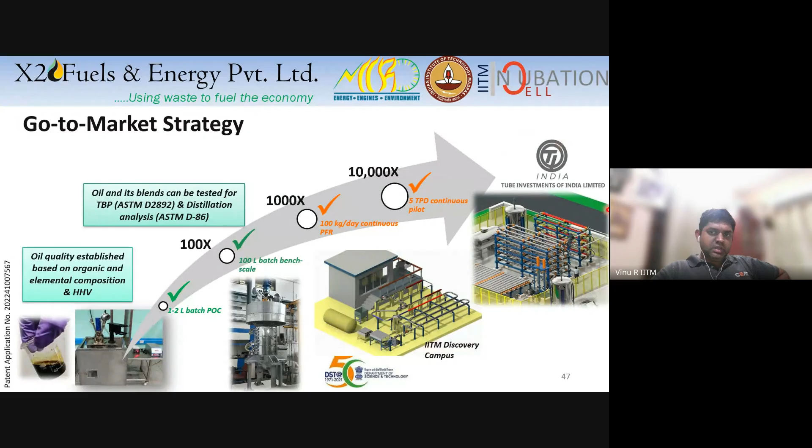Okay, so with this, I think I would like to close my talk. Of course, I would like to have some discussions from your side.

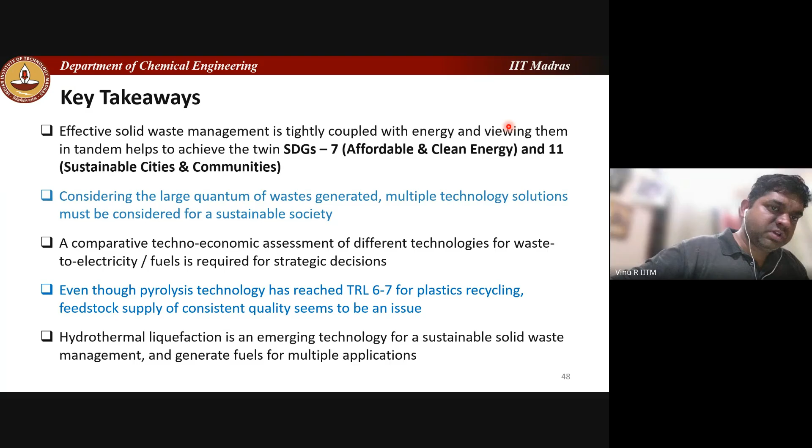So effective solid waste management is tightly coupled with energy. This is one bottom line or take-home message I would like to tell you. Viewing them in tandem helps us achieve SDG 7, which is affordable and clean energy, and sustainable cities and communities. You can't decouple energy and waste. So when you're planning for renewable energy or energy self-sufficiency, it is also good to consider energy that you can derive from wastes.

Considering the large quantum of waste generated, multiple technology solutions must be considered. Techno-economic assessment is something that's very important, and feedstock supply for pyrolysis technology is always a challenge, and HTL is basically an emerging technology that I have presented over the past 10 minutes.